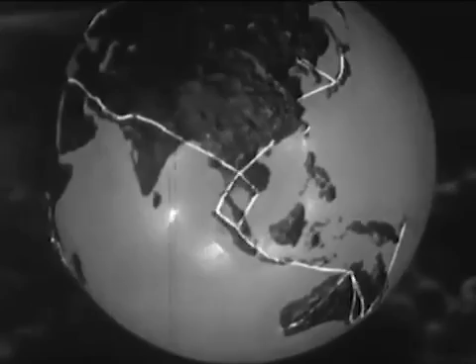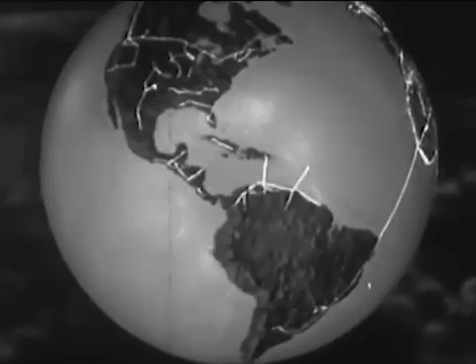Worldwide coverage, but it has not been accomplished in a day. It is the result of a smooth-running combination of men and machines. In that combination lies the story of Lockheed itself. It is a success story, modern, exciting, typically American.

The Lockheed Aircraft Corporation plant, Burbank, California, in 1926. And today, the same company, the same location, but quite definitely not the same plant.

As recently as 1932, sales aggregated the overwhelming total of $23,298.03. In 1940, actual deliveries amounted to more than $42 million. And conservative estimates indicate that in 1941, this figure will be more than doubled.

And to the men of Lockheed belongs a large share of the credit, to their skill and to their loyalty. They are a cross-section of typical American workmen: drillers, riveters, tool makers, die casters, machinists, and technicians.

In 1931, there were only 300 of them. In 1941, over 35,000. Every man who checks in, from office boy on up, has taken and passed exhaustive tests covering intelligence, temperament, and special aptitude to prove his individual ability.

35,000 American workmen, the right men for the right jobs to build the best planes. This is not a trick shot made with mirrors.

It is the drafting room of the engineering department where every new Lockheed has its beginning, conceived with the purpose of supplying the answer to definite needs of the aviation industry. To attain this goal, over 850 engineers make over 5,000 drawing plans, devoting a total of over 200,000 work hours to their mission of creating one new design.

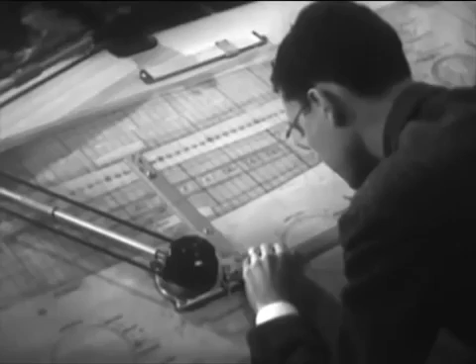The component parts of a modern airplane's wing, fuselage, and tail surface are almost countless in number, yet every single one of them must be engineered. Even the most minute part receives the greatest attention. Four separate drawings are made showing detail from four different angles. Although the part is no larger than a silver dollar, it will have to go a great deal further.

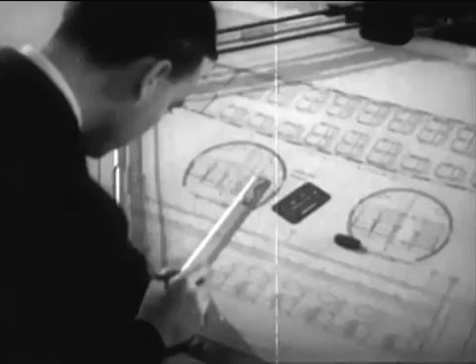The interior of a plane is one feature of design seldom associated in one's mind as coming under the supervision of the engineer. Yet one of his most important jobs is to provide utter comfort for passengers traveling through the air at high speeds. The Lodestar's cabin has been designed for this comfort. Inside, the sound of powerful motors is reduced to a pleasant hum by scientific soundproofing and vibration control. Restful chairs, ample space, and headroom are results of thoughtful planning.

All Lockheeds are especially adaptable to the requirements of private owners. For businessmen to whom time means money, the Lodestar is convertible into a convenient and dependable office in the sky. The compact 12 becomes a comfortable lounge for attending important events anywhere at any time.

The cabin of Lockheed's new four-motor transport, the Excalibur, will look very much like this. Although the plane is still under construction, the engineers have built an exact replica, known as a mock-up, out of wood. In this way, every possible detail of passenger comfort can be effectively predetermined and applied.

But the ideas and plans that this man and the hundreds like him put into execution are not only those of Lockheed's chief engineers, but those of the entire flying world. For the Market Research Division maintains close contact with the operative branch of the industry. The staff compiles lists of important features relating to a plane's design.

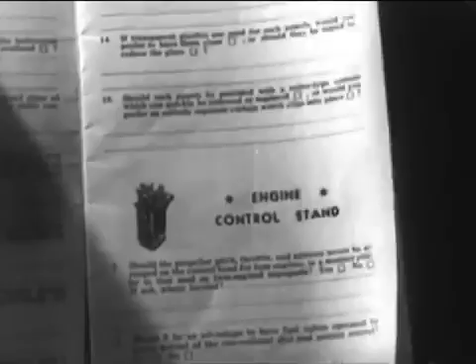These findings are set up in the form of questionnaires. If you were to build your own ship: on the flight station, where would you locate emergency controls? On the engine control stand, where would you put the levers? And the rudder pedals?

These comprehensive questionnaires are sent to airline executives, pilots, and transport officials in every corner of the world: to Trans-Canada Airlines, R.C. McLeod in South Africa, Tri-American Aviation in Buenos Aires. The list is almost endless, but to mention a few more: American Airlines, Lieutenant Thatch of VP-5 Squadron Canal Zone, and British Airways.

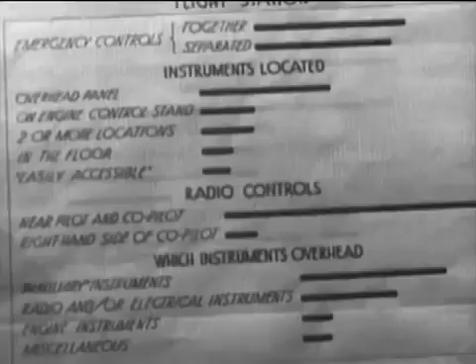The replies to these pamphlets are carefully sorted, for they represent knowledge gained under actual flight conditions. Detailed graphs and charts are compiled by competent statisticians. No suggestion is too small. Every answer to every question is checked and noted. These findings are recorded in another pamphlet.

You told us this is the way you would do it: on flight station, on engine control stand, and on rudder pedals. We asked, are brake toe pedals desirable? 93% said yes, 7% no. That verdict is submitted by men whose combined opinions represent the experience of over 16 million hours of flying.

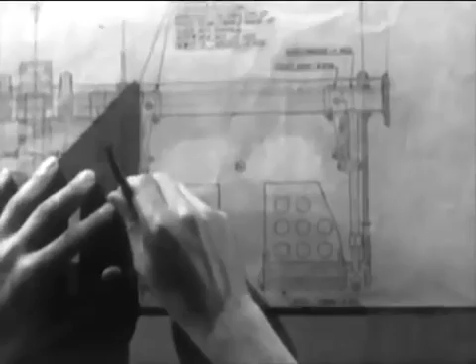These practical viewpoints, as gathered by market research, are submitted to the engineers. They combine these ideas together with their own creative ability in the conception and building of every new Lockheed plane. That's how Lockheed designs airplanes to suit the men who know airplanes best: operators, pilots, and regular airline passengers.

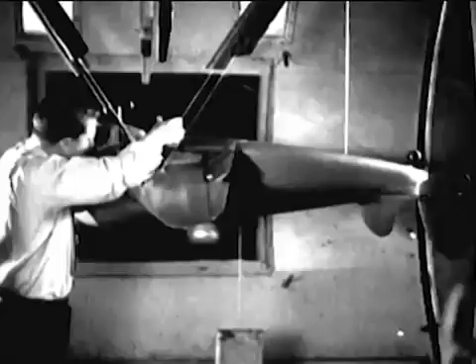And the first form a new plane takes is on paper. From these drawings and thousands like them, an exact scale model known as a wind tunnel model is made and is connected to instruments which determine its flight characteristics. The model is hand-carved, accurate to the fraction of an inch, weighs over 500 pounds, and costs more than $5,000 to build.

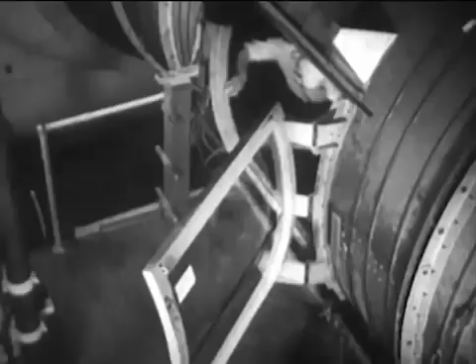The door is closed, the wind tunnel sealed. A flip of the switch, and the wind propeller whips up to speed. The model is exposed to a far higher velocity than this 90-mile-an-hour wind. The small wind tunnel model is actually subjected to and withstands a much greater force.

From an idea to an actuality, from theory to fact, from a model to a completed Lockheed, the plane has been built. More than that, into it has been built the strength, ruggedness, and durability necessary for its safety and high-speed performance. But not so long ago, this shining plane was only a small part of a trainload of metal addressed to Lockheed.

For the metal inside these wooden frames is the stuff that planes are made of. Hard and strong, it must be fabricated by men and machines into the parts that make airliners. Giant shears act as huge mechanical scissors. Metal sheets are slipped into place. The sharp blade strikes and cuts through them as if they were cloth.

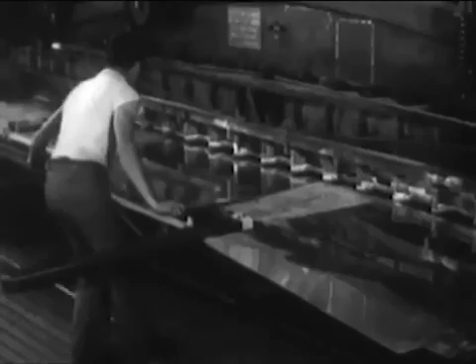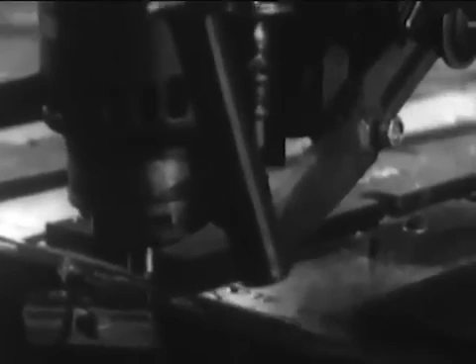The high-frequency router, a dental patient's nightmare, turns 15,000 revolutions a minute and cuts layers of metal into their first rough shape. The bit turns so fast that it must be cooled by a constant stream of oil.

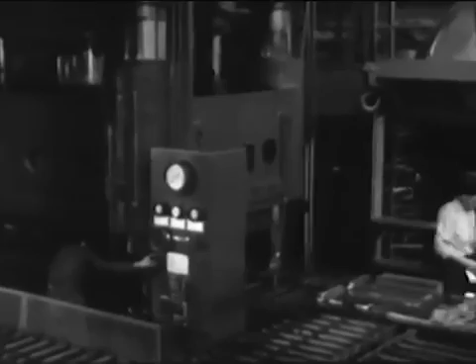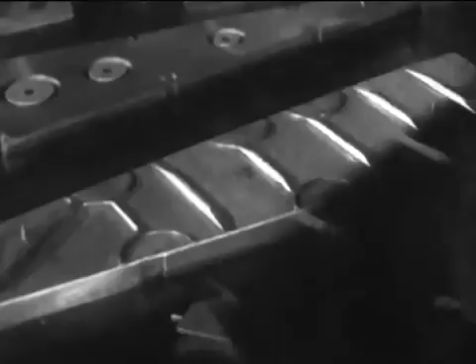The massive hydro press exerts an overall pressure of 9 million pounds, and it literally squeezes parts out of metal. An endless chain of roller conveyors carries a tray with the forms to workmen. They put the metal, which has already been cut to the correct size, in place on the forms. The tray now continues on its way into position under the press.

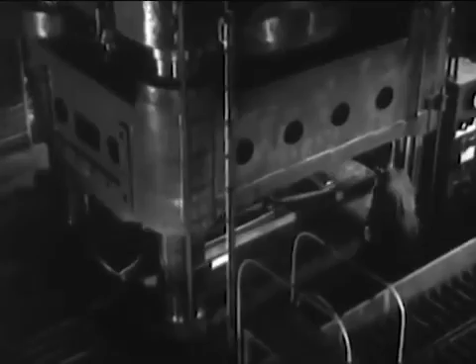The operator touches a switch, the press starts down, and look out below. Almost unbelievable pressure, an irresistible force, but under perfect control. And where plain sheet metal went in, finished parts come out. The hydro press turns out more parts in 1 minute than 2 men could complete in a whole day, and turns them out better and more accurately.

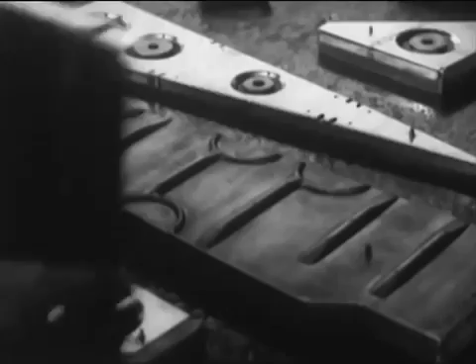A compressed air stamp which forges metal is an excellent example of powerful machinery under absolute control. Taps as gentle as a tack hammer, then the crushing impact. What a nutcracker this outfit would make. And yet its control is so delicate that it can crack an egg, at least so the operator claims.

Look out there, a little too hard and you'll have an awful mess. Be careful. Well, hello, stranger. You certainly have a brand new kind of a mama.

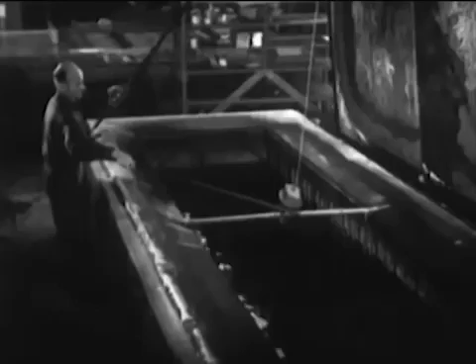Skilled men and precision machines have fabricated these parts. But even metal can be strengthened and protected. To do this, there are several types of processing. Complete electrochemical anodizing baths provide parts with a protective coating of oxide film. This is a safeguard against the threat of corrosion caused by moisture. It is an interesting fact that these parts are protected against any harmful effects of moisture by being given a bath.

Another type of bath is used for a different purpose. In order to harden and thereby strengthen certain parts, they are immersed in a hot salt solution of sodium potassium nitrate. In large ovens, other parts are hardened by baking at 1550 degrees Fahrenheit and quenching them in oil. It is easy enough to say that these parts, which will eventually be the plane, are strong. To prove that they are, to constantly guard the Lockheed measure of strength is the duty of the testing laboratory.

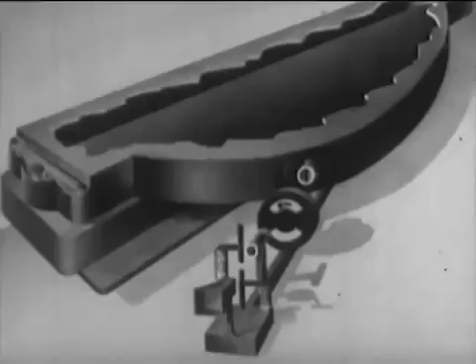A spectrograph is one of the most modern scientific testing devices. It analyzes the purity of the metal alloys which go into a plane. Tremendous heat created by an arc burns sample filings of the metal. These filings are placed in a cavity on the lower of 2 acid-treated graphite electrodes and then burned. The light of the burning metal passes through a lens and then through a rotating sector, the adjustable opening of which controls the amount of light falling on the slit.

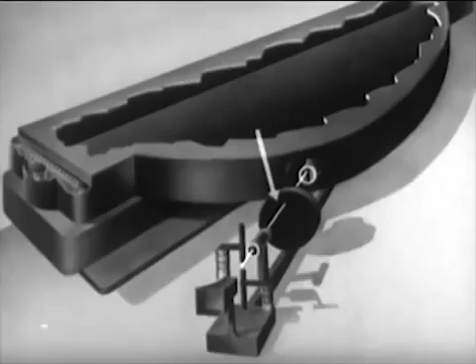The light now passes through the slit and falls upon a diffraction grating. This diffraction grating is a concave aluminized glass plate on which 24,000 lines per inch have been ruled with a diamond point. The light is separated by the grating into wavelengths. These wavelengths, or light rays, fall upon a strip of film, and a photographic record of them is thus produced. Since each element has its own wavelength, from the developed film, it is possible to determine exactly which are present in the alloy. In this manner, the spectrograph immediately detects all impurities, and any inferior metal is promptly discarded.

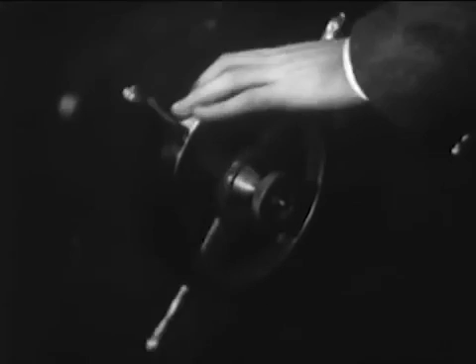The sole purpose of this huge machine is to break things. Its powerful jaws, capable of a compression of 300,000 pounds, are about to crush a small section of the wing in order to measure its resistance. Now watch carefully. The upper jaw is clamping down with an invisible, relentless force on the seemingly frail strip of metal. But actually, just how frail is it? 60,000 pounds? 70,000? There it is, a slight ripple. The breaking point has been reached, and it takes a pressure of over 80,000 pounds to even bend this frail little section of a wing.

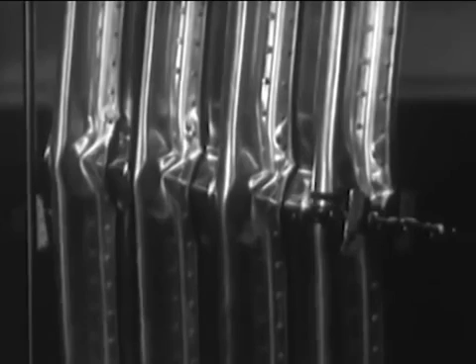For contrast, let's see what happens to a solid cylinder of concrete, which certainly appears much stronger. There is the first crack, and the concrete shatters completely under a pressure of less than 75,000 pounds.

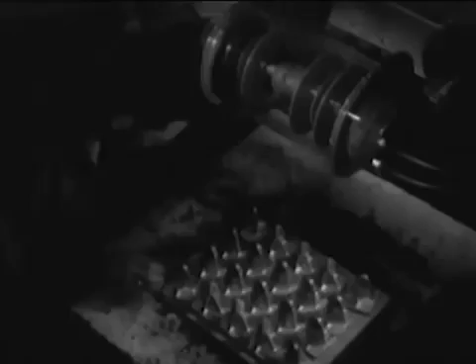All stressed parts, such as forgings and castings, are X-rayed for any possible flaws in the metal. Lockheed X-rays more parts than all other aircraft manufacturers combined. They may look new and shiny on the surface, but that doesn't matter. What are they like underneath? This batch is fine, perfect.

A different story here. Those slight, almost imperceptible flaws which doom it to the scrap heap would be invisible to any eye other than the X-ray. Therefore, although it is important to know what is on the outside of a plane, every stressed part is X-rayed because Lockheed thinks it is even more important to be absolutely positive of what is on the inside. Yes, every part of this plane is built for the strength, ruggedness, and durability to achieve the highest speeds.

And there goes the Lodestar. Carrying a full load of 17,500 pounds, it speeds down the runway for the takeoff. In 15 seconds, after a run of only 860 feet, it leaves the ground and soars into the air. Climbing rate 1,200 feet per minute.

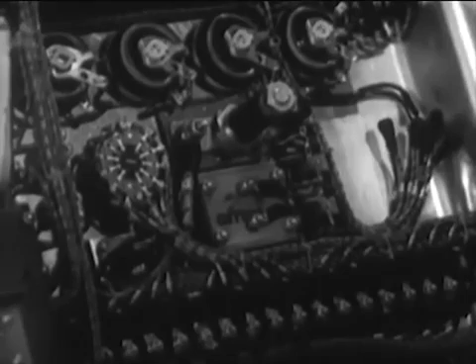And while the plane is in flight, the dials and indicators on the panel are the guides by which a pilot flies. Over a half a mile of wire connects them with the controlling instruments, which must be infinitely accurate before they are installed. In the instrument testing laboratory, each instrument and accessory is, to all intents and purposes, actually flown before being installed on the plane itself.

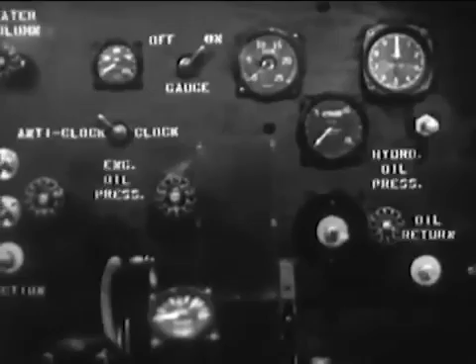For instance, on this stand, a motor duplicates the swing of a plane to test the turn and bank indicators. Here, tachometers are also tested, and propeller governors, vacuum pumps, fuel pumps, starters, generators, and hydromatic motors for feathering propellers. The automatic pilot is checked by a vacuum system against mercury manometers. This small box can guide a plane in flight, keep it as true to its course as the most experienced pilot.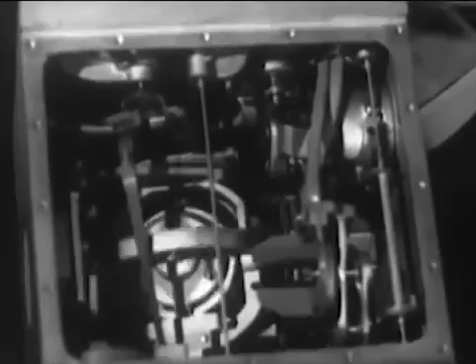An airplane is a chain of which the thousands of separate parts are the links. They must be forged together in order to shape the wing, the tail, and the fuselage. The duty of the wing is to provide the lift that sustains the flight of an airplane. Here in the plant, it must be assembled as flawlessly as it was designed.

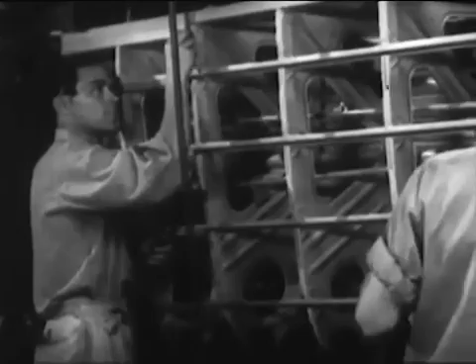Although a wing is generally considered as a unit, it is really composed of 3 parts, 2 outer sections and the center section. We are all familiar with the general shape of a wing, but while an outer section is in the first stages of assembly, we can get a good idea of the complex structure on the inside. Every rib and crosspiece has its purpose. Remember, it was just a small part of the wing that we saw withstand a compression of 80,000 pounds.

Each operation is executed with precision and care as the outer section moves down the production line and takes shape. High-speed electric drills punch holes for the rivets. There are more than 700 drillers or riveters who have all had previous training. Even so, before they're assigned to actual production, they must attend Lockheed's own school until they can uphold the plant's standard of efficiency and skill.

There are more than 50,000 rivets on a completed wing, and every one of them is checked, examined, and checked again. This requires an army of over 200 inspectors, such as this one. But by the time a Lockheed plane is assembled, every square inch of it has been inspected at least 5 times. Inspector number 158 finds this row perfect and okays it.

And the story of one outer wing section is the story of 10, of 20, of 1,000 sections as they move down the line in an endless parade. Mass production with the emphasis on precision and quality. The assembly line for the center section of the wing is one of the largest and most vital units in the plant. It has to be because the center section is the strong man of the plane.

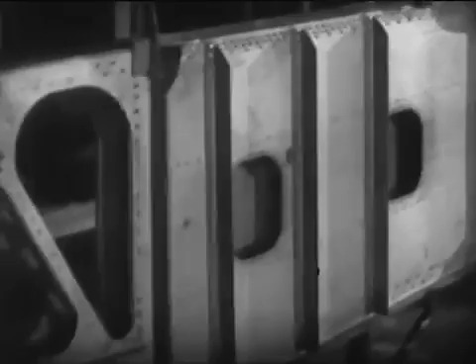And the main beam is built just like a bridge. At all times, it carries all of the flying load, the engine load, and the landing load. And it is stressed to support more than 5 times the total weight of a fully loaded plane. Completed and assembled, capable of supporting a static load of 70,000 pounds, the wing will do its job as the men who built it have done theirs.

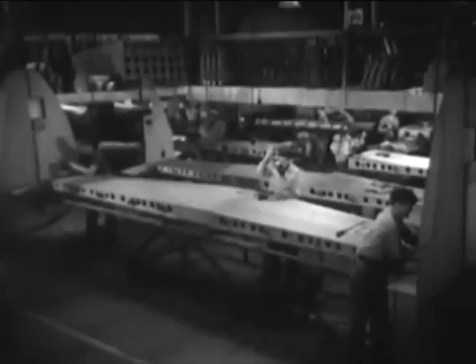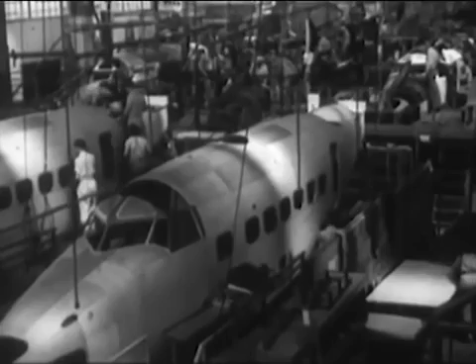The tail surfaces control the maneuverability of a plane. The use of twin rudders was developed by Lockheed and are one of the distinguishing features which point out every Lockheed. The fuselage is the body of the plane. It represents the final word in aerodynamic design and streamlining. And during construction, these basic principles are built into the fuselage and applied to every operation from the beginning to the completed shell.

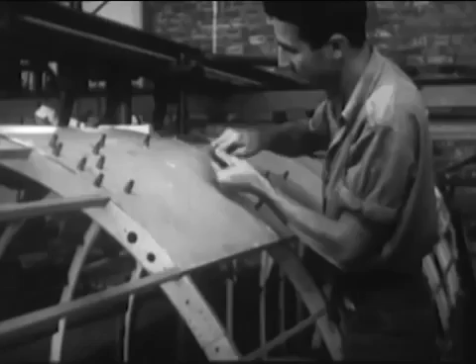As the first step in its assembly, the bulkheads are joined together by stringers, which form the basic shape and strength of the fuselage. Skin fitters then fit and shape the metal sheets, attaching them with removable fasteners. On their heels come the riveters, while every stage of the assembly is constantly under the close check of inspectors.

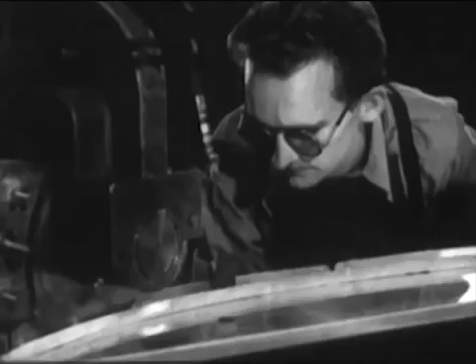Assembling with electric continuous spot welders facilitates production and gives many fuselage parts an extra smoothness for better streamlining. With an eye to the future, Lockheed is constantly enlarging on this process because better streamlining means greater speed. And so another fuselage is finished and ready for mating with the wing.

Like a ship being launched, it moves slowly down the ways. Slowly now, yes, but for just a little while longer. Soon sunlight will be glinting from its metal sides. Its nose will point upwind. In the comfort of its cabin, passengers will read or write or sleep or think after their own fashion, and beneath it, the lakes, rivers, and valleys of the countryside will unfold. Slowly still, the fuselage is lowered into place, united with the wing, and now, slow no longer.

Speed on the water. Speed on the snow. Speed on wheels. On rails. Speed on wings. There is truth in the slogan that it takes a Lockheed to beat a Lockheed.

And as the plane approaches the field, it slows down for the landing. The Fowler flap has been adopted and developed by Lockheed. The flap gives a greater lift to the wing and provides a brake action to reduce the speed. The plane lands at 65 miles an hour, and from a height of 50 feet, it can come to a complete stop in less than 600 yards. This Lockheed Lodestar, with its safety, its comfort, and its great speed, typifies the ideals of aviation in America.

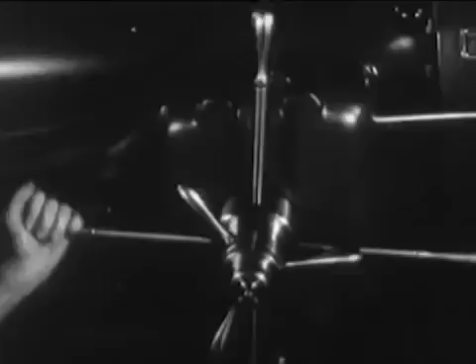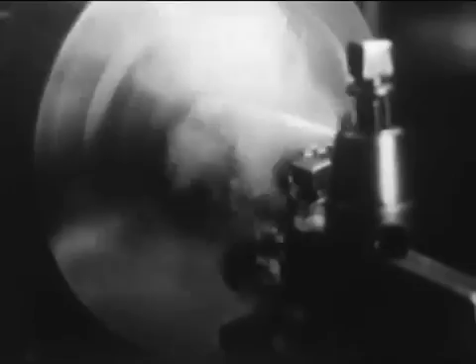The P-38 is a completely new development in conception and design. The purpose of this deadly single-seater fighter is to prevent any would-be attacker from reaching his objective. Lockheed is building vast quantities for the United States Army, and many of its features are closely guarded military secrets. But it can be revealed that the P-38 will climb a mile in a minute, and its motors are so quiet that it can approach any target almost without warning.

And as wings soar higher above America, so are soaring the hopes of free men the world over. For they know that whether it be for commerce or defense, ship for ship, American planes have no equal. And just as Lockheed commercial transports serve the people, so do the Lockheed military planes stand ready to serve should the need arise. The striking power of Hudson bombers, the speed of the P-38,